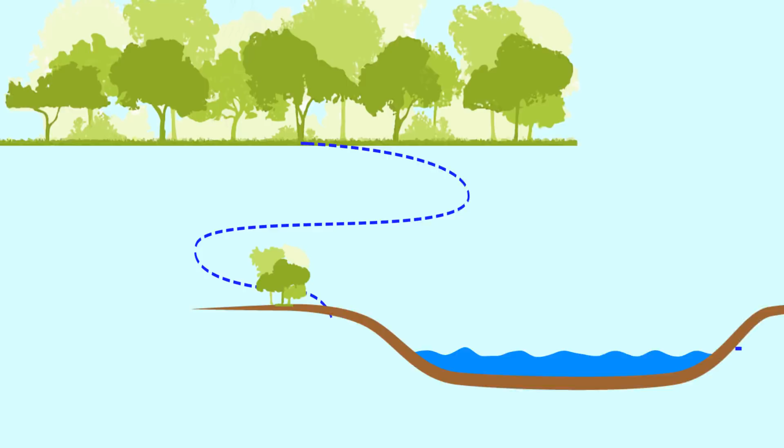First of all, we need rain. Rain will fall in areas called catchment areas. A catchment area is a large geographic region, usually with very spongy soil, that will collect and hold on to rainwater. In Victoria, the majority of our catchment areas are either state forests or national parks. The water flows through rivers and seeps through the soil into large reservoirs, and is then directed to water treatment plants where the water is filtered, purified, and fluoridated.

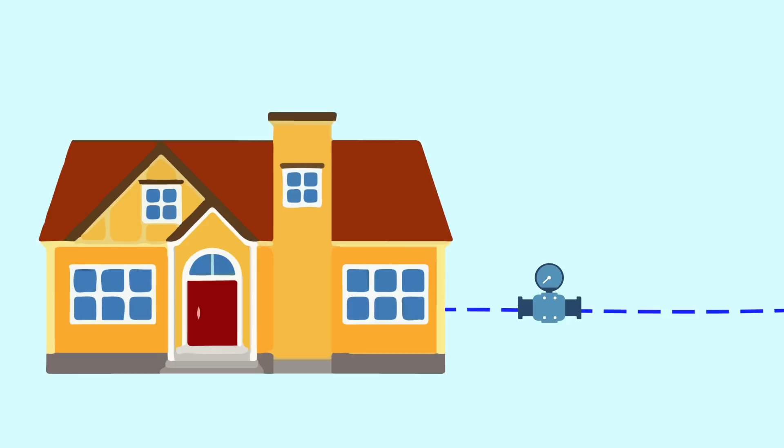The water is then directed to smaller service reservoirs before being distributed through thousands of kilometers of pipes to businesses and households. Each property is connected to a meter which records how much water is being distributed and used.

We have a main water line distributing water across the neighborhood. This water is called the mains water. Secondary pipes then connect the mains water line to individual properties via the water meter. Because the water is already pressurized, usually by gravity, it is pushed into the house without the need of a pump. Pipes running through the walls, floors, and ceilings then carry the water to the different faucets and water fixtures like the wash basin, the shower, the toilet, the kitchen sink, the washing machine, etc.

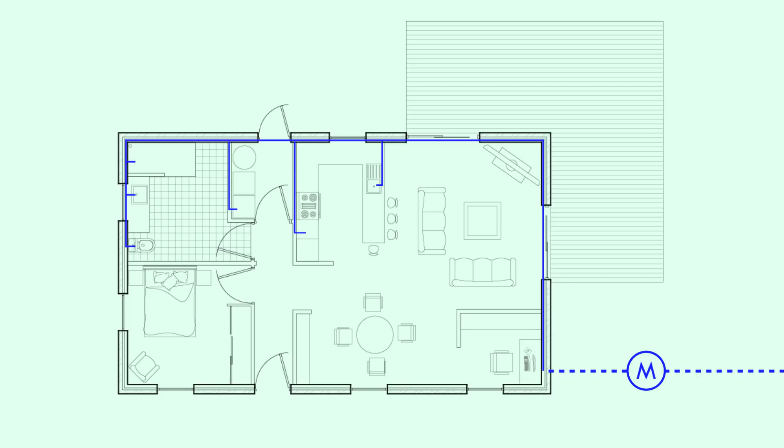A hot water system is needed to produce hot water, and the first thing that you need to make hot water is cold water. So cold water is fed into the hot water system and the hot water is then distributed to the necessary fixtures.

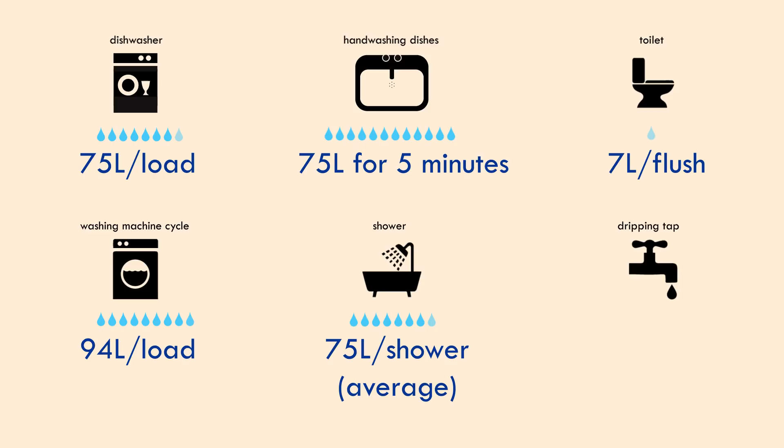Something else that many of us don't realize is that households use a lot of water. There are big water wasters such as the dishwasher and the washing machine, and some estimates even claim that a dripping tap of water can waste up to 20,000 liters of water a year.

So what can we actually do about this? Well, out of the water uses we have seen previously, only consumption really requires clean, purified water. Consumption includes drinking, cooking, and dishwashing - any use that may result in the water being ingested. The rest can use alternative sources of water.

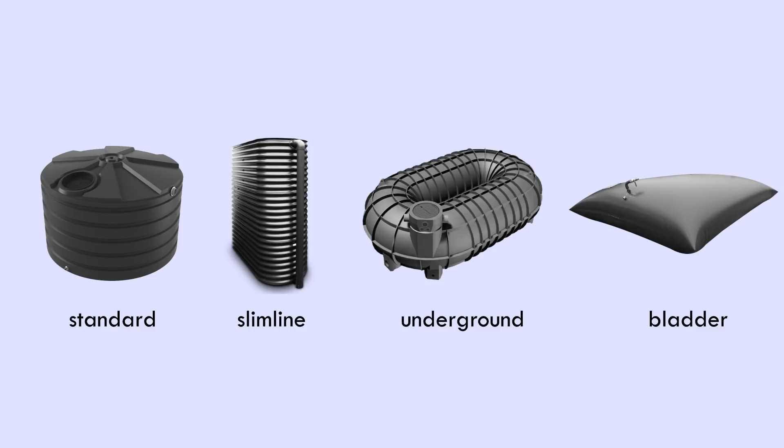To collect rainwater, you first need a tank. There are several types of tanks, and the suitability of each will really depend on the situation. But regardless of what tank is used, the collection process is very similar. In theory, we have a roof, a gutter, and a downpipe, and the water just flows into the tank. The actual setup is a bit more complicated than that.

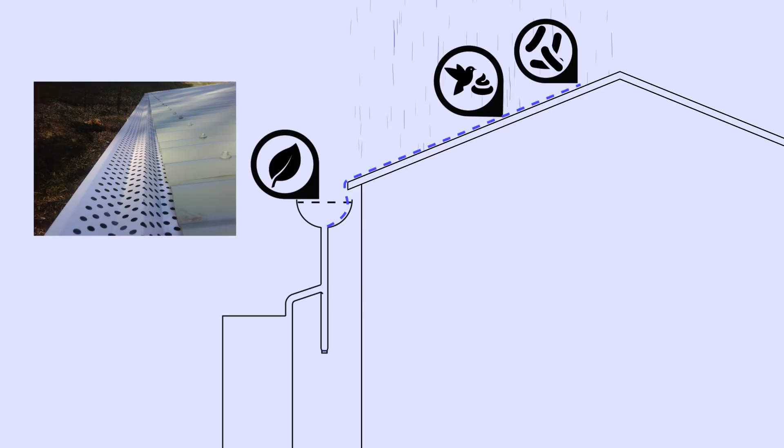A roof is not a clean surface and will often be covered with pollutants such as leaves, bird poo, dust, and all sorts of germs. If there are no proper mechanisms in place, the pollutants will end up in the tank and eventually in the house plumbing. The first mechanism is the gutter guard, which is a mesh that sits over the gutter and filters out large debris such as leaves. Small and soluble pollutants will pass through the mesh.

This is where the first flush kicks in. The first flush is simply a tube that fills up as the rain falls. All the pollutants on the roof are washed from the roof and collect into the tube. A floater inside the tube will gradually rise with the water level, and when the tube fills up, the floater will block the entrance of the tube, locking the pollutants inside. The remaining water is then redirected into the rainwater tank. The pollutants inside the rainwater or in the air will not necessarily be redirected to the first flush, and some will inevitably make their way to the rainwater tank.

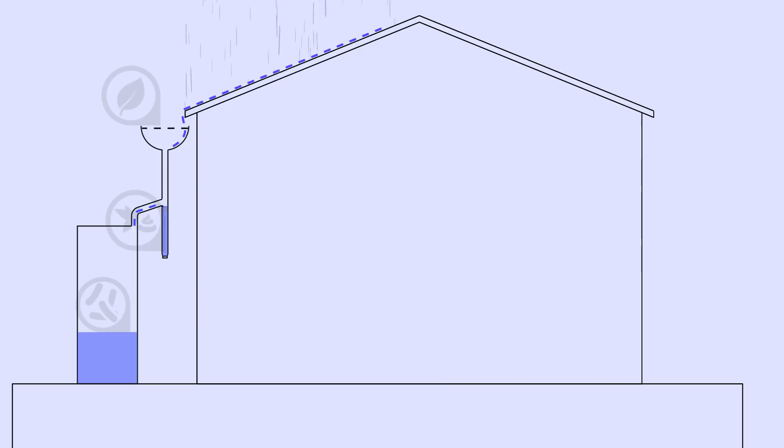Water is then pumped through a filter and into the house, and depending on what type of filter is used, more pollutants and some of the bacteria might be filtered out.

What if we want to collect water from both sections of a roof? We can use what we call a wet or charged system. We have a very similar setup on the other side of the roof, connected by a pipe of water going either under or around the house. The column of water on one side pushes the water up and into the tank. It's called a wet system because there's always going to be water remaining in the pipes, even with no rain.

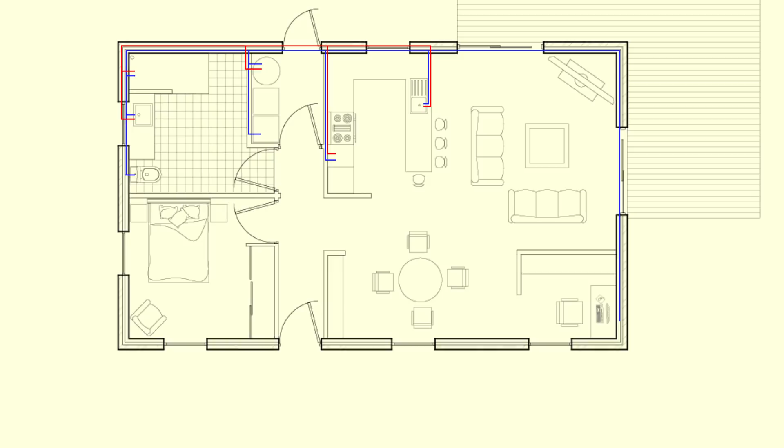So how is rainwater distributed inside the house? Let's look at two scenarios. First, the rainwater is used everywhere. First of all, cold water pipes are disconnected from the mains. We start with a rainwater tank, a pump and a filter, and the rainwater pipes run through walls, floors and ceilings just like with the mains water.

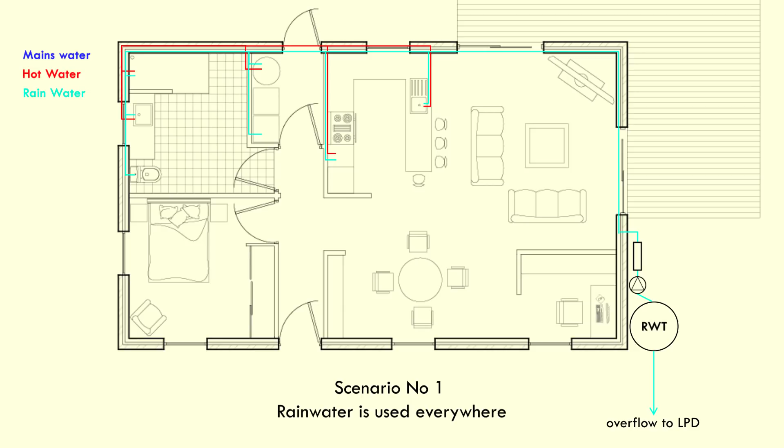The rainwater tank is also fitted with an overflow to the legal point of discharge in case the rainwater tank fills up. In the eventuality of the opposite, if the rainwater tank runs out of water, the tank also needs a mains water backup. How does that backup work?

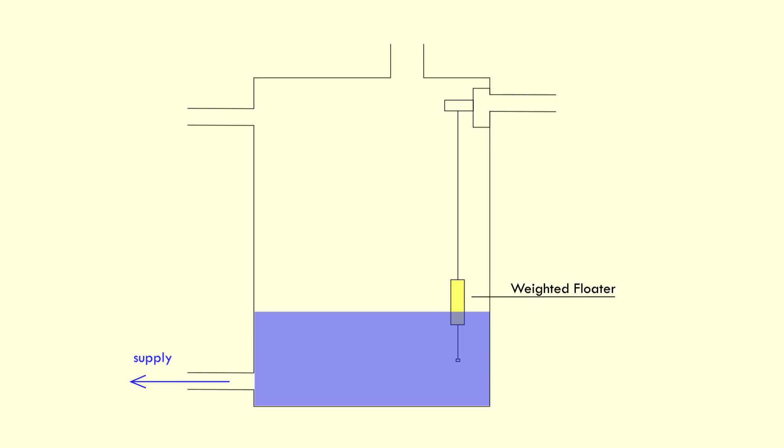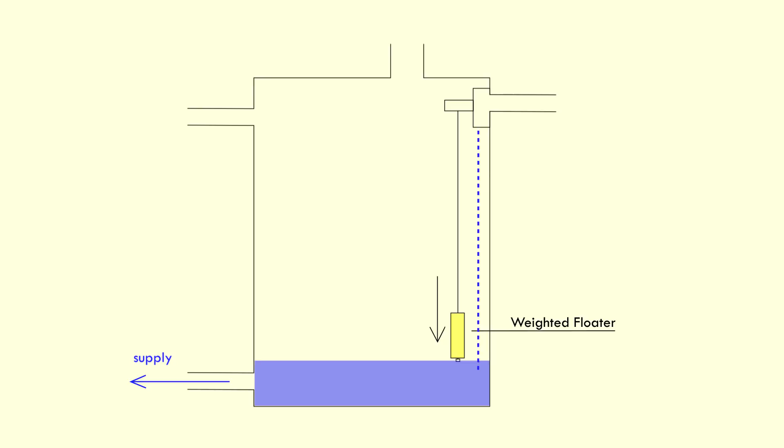Inside the tank, there is a weighted float connected to a cord. When the water level drops as the water is being used, the float drops as well. At a critical level, the weight of the float will pull down the cord, opening the valve and allowing the mains water to flow from the top. As the water level and float rise again, the valve is closed and the main water flow stops.

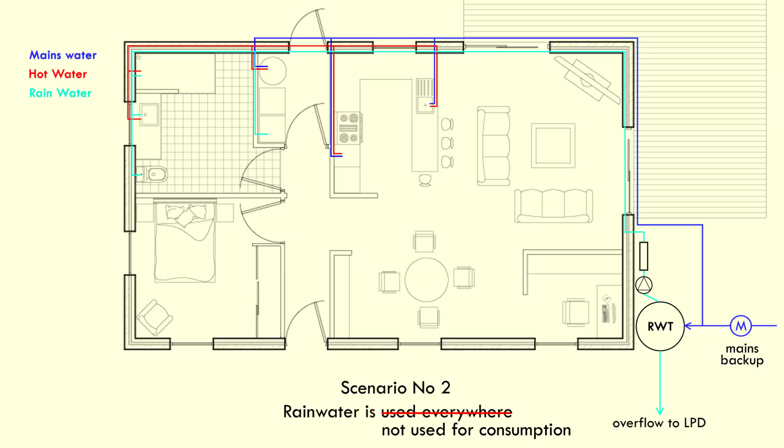In the second scenario, water is not used for consumption, so not in the kitchen. Instead, a dedicated mains water line runs directly to the kitchen sink, the dishwasher and the hot water system. It is important that the hot water system be connected to the mains water as well, as part of the hot water will go into the kitchen and the dishwasher.

Be careful not to connect water fixtures to both rain and mains water. The mains backup happens at the rainwater tank, not at individual fixtures.

The next type of recycled water is grey water. So what exactly is grey water? Depending on whom you ask, the definition of grey water varies, but in this video, grey water will be defined as the water recycled from laundry and showers. Where can you reuse that grey water? Only for toilet flushing and gardening.

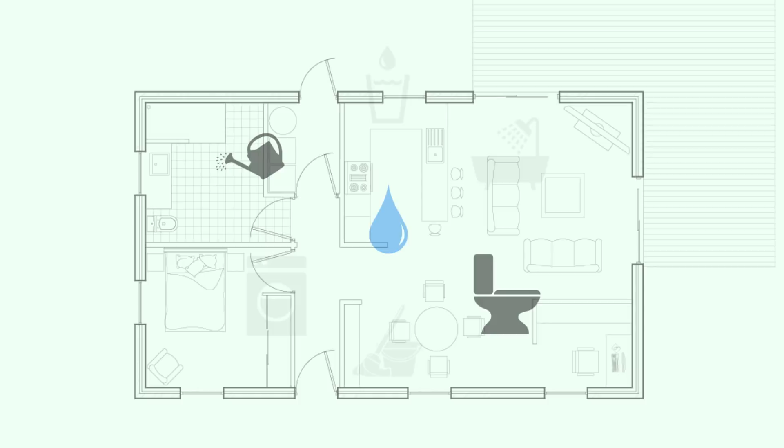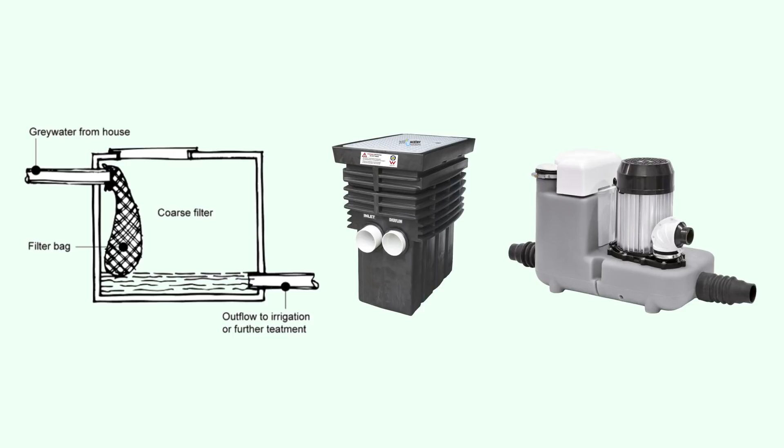So we collect the water from the shower and the washing machine, and that grey water is then collected into a grey water system. Grey water systems vary widely in shape and size, from the simplest systems just filtering to the more complex ones involving biological and chemical treatment.

The treated grey water is then distributed to the toilets and garden taps. Not all plants are grey water tolerant, so you will need to be selective as to where you use the grey water outdoors. It's not uncommon either to have a rainwater backup into the grey water tank.

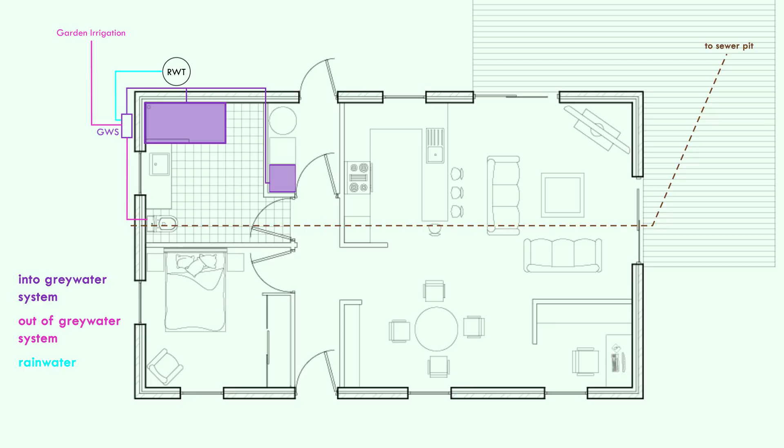So what about the water from other fixtures? It's called black water, and it cannot be recycled, at least not on a residential scale. There is a main sewer line for the house, usually running under the toilets. The sewer line ends at the sewer pit on one side and the sewer vent on the other. The different water drains then connect to the main sewer line in the most direct path.

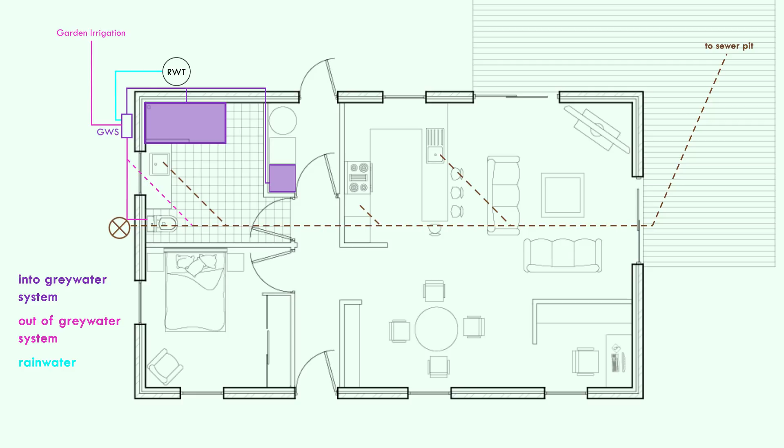The grey water system also has an overflow into the sewer, as untreated grey water cannot be kept for more than 24 hours. Sewer moves using gravity, and sewer connections must be considered very carefully. Right angles are not usually a good idea because they can cause clogging. Avoiding right angles is better, and minimizing the number of corners the sewage needs to take is best.